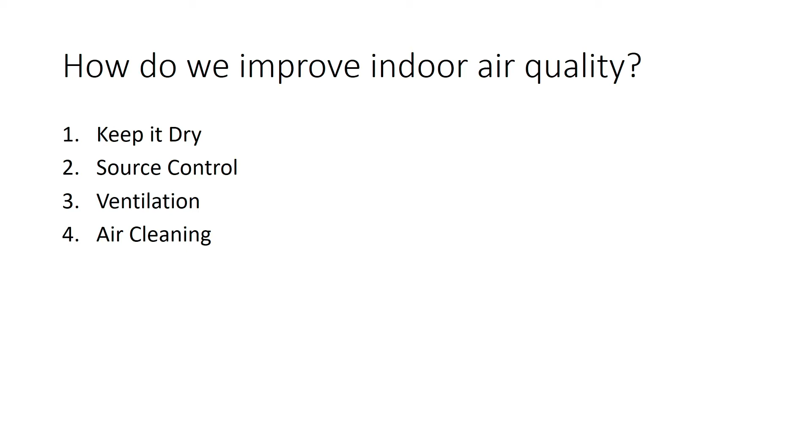And to put things in context, I want to situate filtration within indoor air quality. We've known for a long time how to improve indoor air quality, and it's briefly summarized by the four things that are on the screen. Some of them have a very long history.

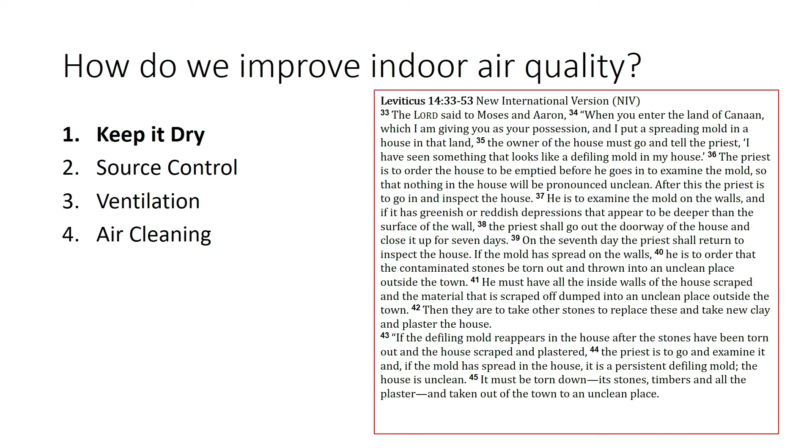Keeping buildings dry - there's a bunch of text here from the Bible that I won't force you to read, but it identifies what to do if you have a moisture problem in your house. The only comment I'll make about it is the field of mold remediation has not advanced greatly in the past few thousand years. We've also known that source control is really, really important.

Get rid of sources indoors so you don't have an indoor air problem. Dr. Pettenkofer, who was a German hygienist, had a lot of pithy statements about indoor air quality, like the one that's on the screen. And we've known that get rid of the problem before it becomes a problem.

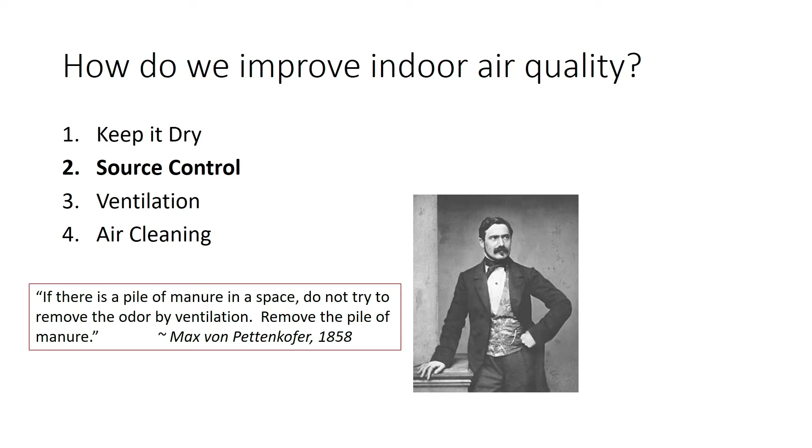Similarly, and from about the same time, we've known how important ventilation is. So these are a couple of chapter excerpts from a book by Catharine Beecher and Harriet Beecher Stowe, two sisters, and they wrote this book about the domestic realm. And it was a bestseller in the late 1860s and 1870s in the US.

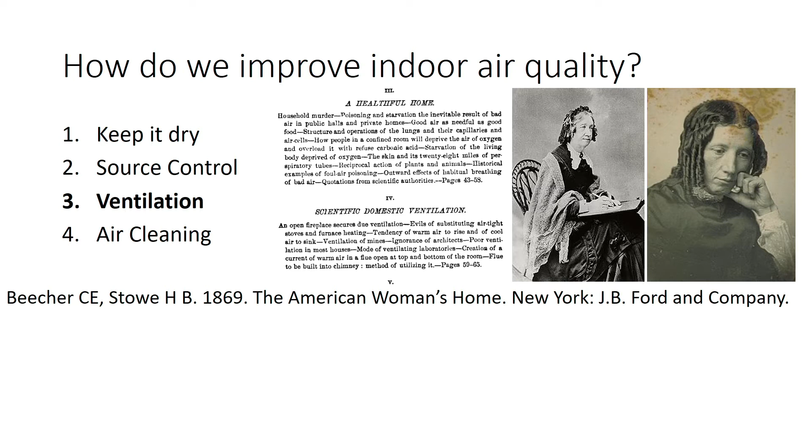What strikes me about this book is, there's a whole chapter devoted to indoor air quality. It was seen as being fundamental to having a healthy home. And then another whole chapter on ventilation and how important ventilation is. There's a tiny bit of aerosol science in this book having to do with venting of combustion as well. And it's just filled with great quotes that indicated that not only did people understand how important indoor air and ventilation were, but it was part of the conversation.

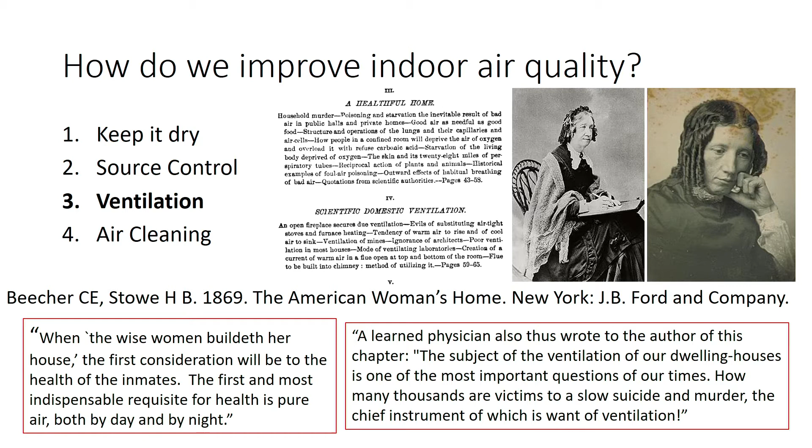And then we get to the subject of today, filtration. And filtration has a much, much shorter history than any of the other items that I mentioned. Filtration was originally largely used in various industrial processes. And then it started, maybe 50 to 100 years ago.

It started being used in buildings, but it was not used to protect people in the buildings. It was used to protect the equipment. Things like fans and coils and that sort of thing. And then it was really in the past few decades that we started using filters, thinking about protecting the people in the building.

ASHRAE standard 52.2, which is a very common filtration standard, and I'll talk more about it a little bit later, it's really only a couple of decades old. Its first version was in 1999. And so we really are talking about something today that certainly isn't part of the popular conversation and doesn't really have the history that other things we think about in indoor air.

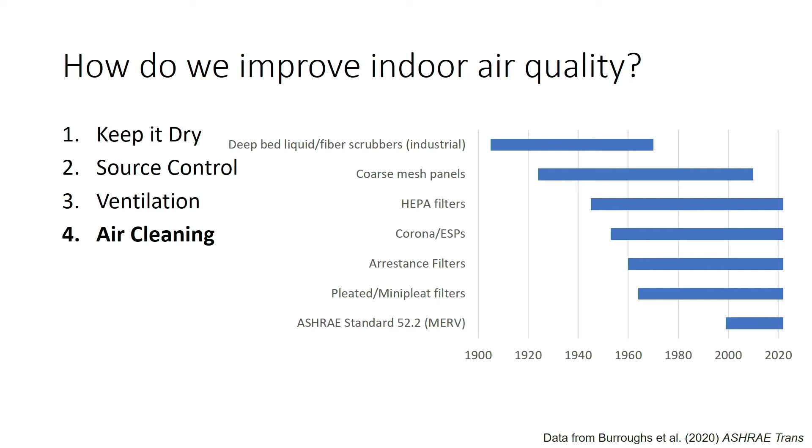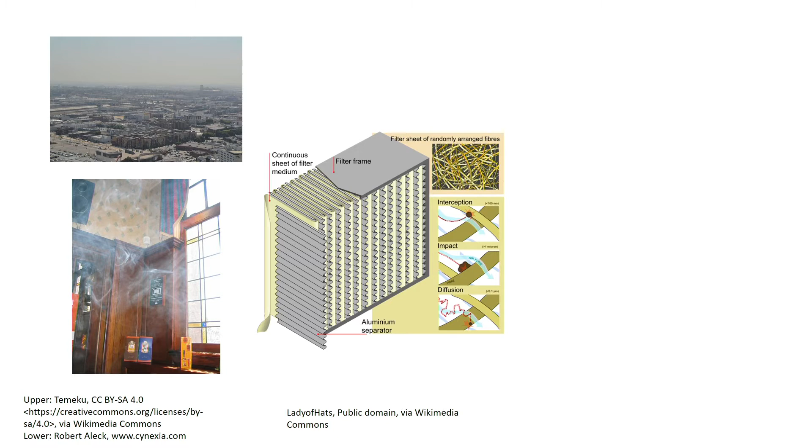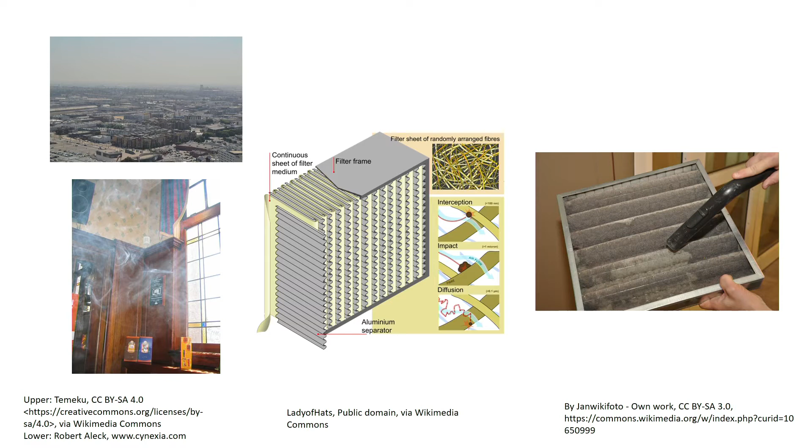Now, having said that, I think why a filter might be valuable is pretty obvious and pretty clear. We have polluted outdoor and indoor environments. We can use a filter that removes particles by a bunch of different mechanisms, and that filter gets dirty, and it's removing things from the air that people won't breathe in the building. So I don't think it's a hard concept to understand why filters might be beneficial.

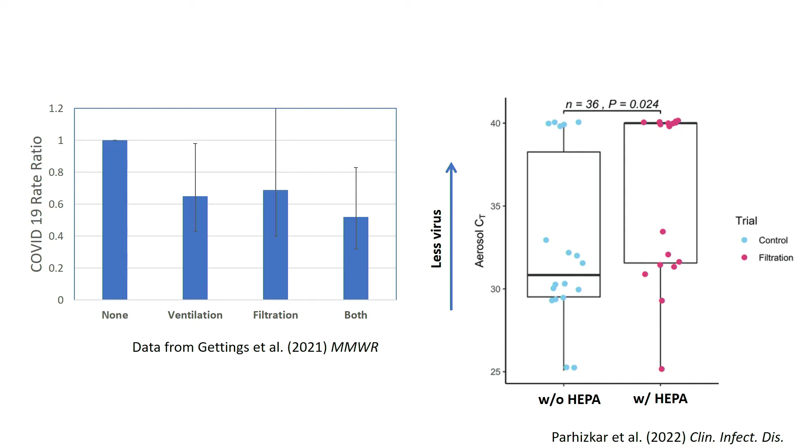What I want to do now is motivate at least the first part of this talk using data from my own university. In the summer of 2021, when University of Toronto was going back to in-person teaching, the university decided to follow a procedure being promoted by AAAR, among others, to improve ventilation and filtration in all classrooms that were going to be used.

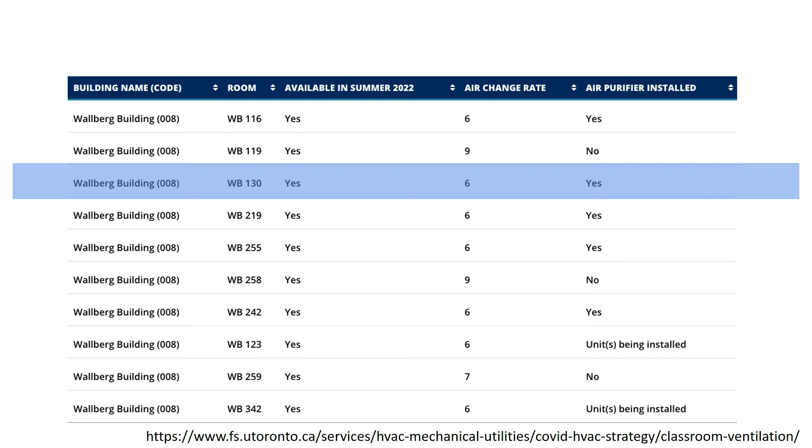Well, of course, we like to measure things. We used low-cost monitors to measure both CO2 and particles in several locations in the classroom, and anytime there was a decay that met our criteria for analysis, we looked at what the removal was. The story is that there was supposed to be about 2 air changes an hour from ventilation; instead we were a little less than 1. And there was supposed to be 6 air changes an hour combined from ventilation plus filtration; instead we were at about 2.

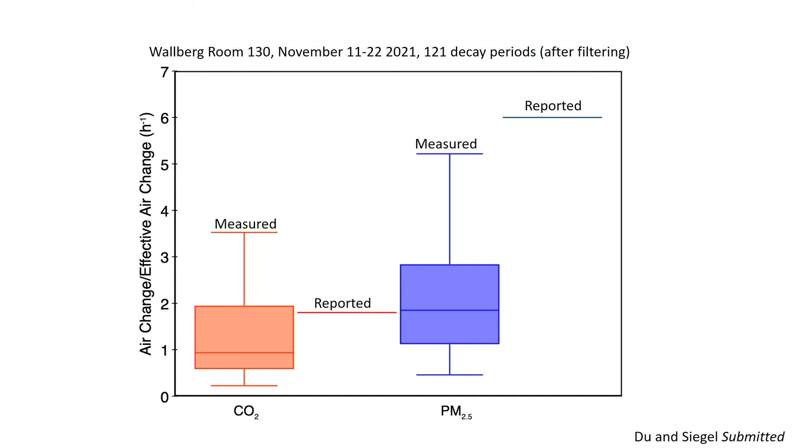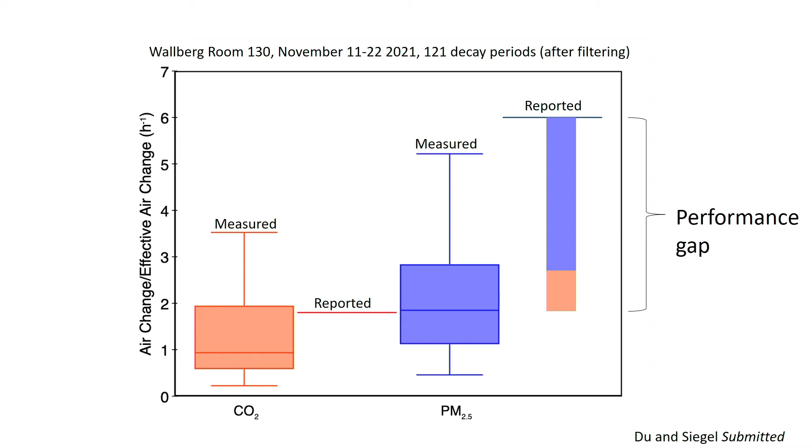So there's this pretty big performance gap. A little is coming from ventilation not doing what it was supposed to, but there was a big gap in what filtration was supposed to be doing. So what I want to do now is talk about why filters don't necessarily do what we think they're doing. The overall story is that we think about filters as objects, but really it's the context and how they're used that determines their performance.

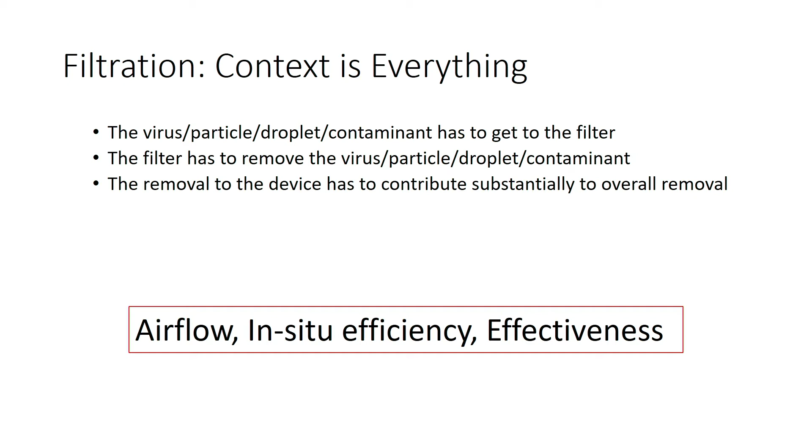I divide this into 3 bins in my mind: you have to get whatever you're trying to remove from the air to the filter; once you get it to the filter, it has to remove it; and then that removal has to compete with all the other loss processes happening in the space. I want to talk about each of those in a little more detail so you have a sense of some common failures.

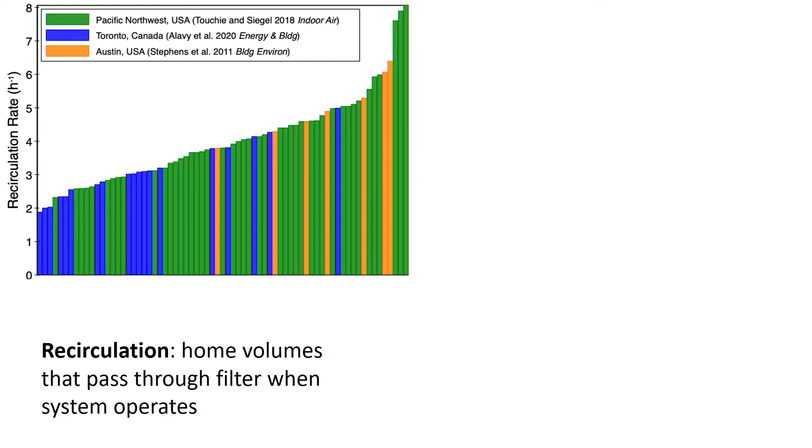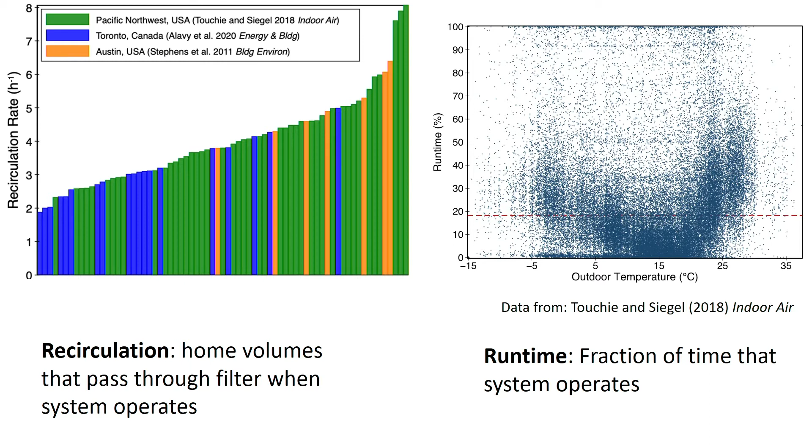You can see there's a little structure here. Systems run more when it's colder or hotter, which makes sense. But the bigger story is, first, there's a ton of variation — some systems at a given set of outdoor conditions run a lot, others barely run at all. Even more important is the average. That red dashed line is the median runtime, about 18% in this sample, which is very consistent with other studies. So 80+% of the time, it doesn't matter what filter you have in place, because air isn't going through it. This is certainly a residential phenomenon, but also true in several commercial systems. So the system really matters, and of course the filter matters too.

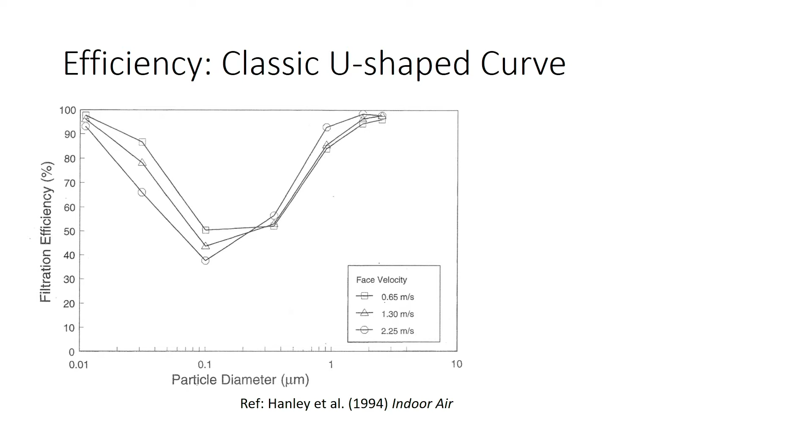Many people here are familiar with filter efficiency curves. They're higher for small particles because of Brownian diffusion, and higher for large particles because of inertial mechanisms. But the reason I wanted to show this picture is that the authors varied the face velocity. When face velocity is high, you get less removal of smaller particles because they don't have as much time to diffuse, but more removal of larger particles because they have more inertia. This matters because face velocities are all over the map in typical HVAC systems, and in many cases they vary too. So the performance you get at any one moment in time will be different than at another moment. This is particularly important for filtration standards.

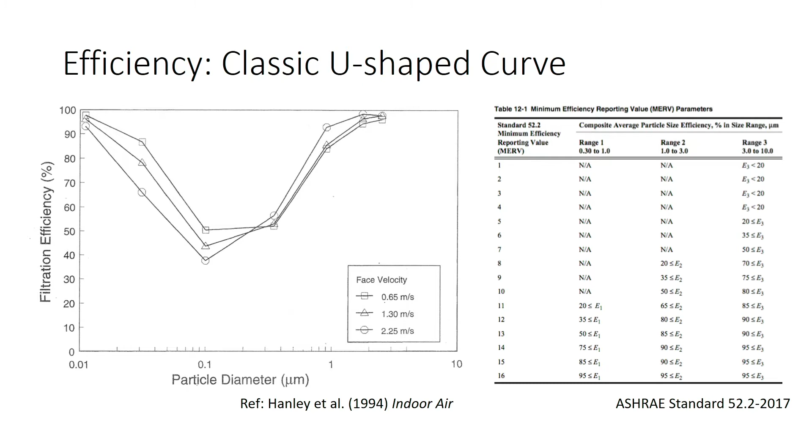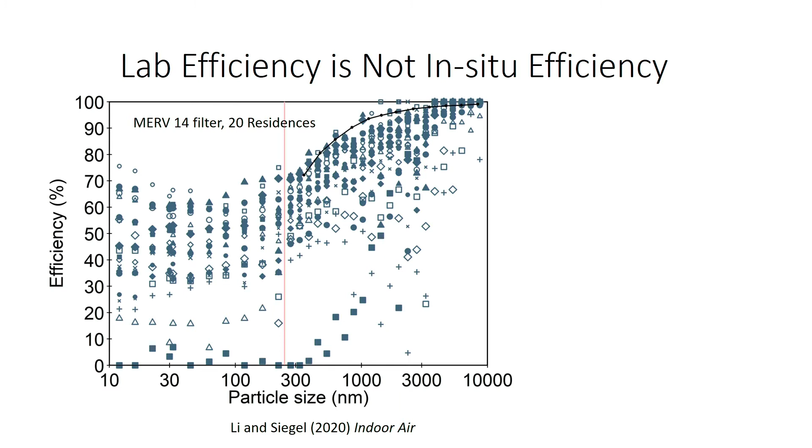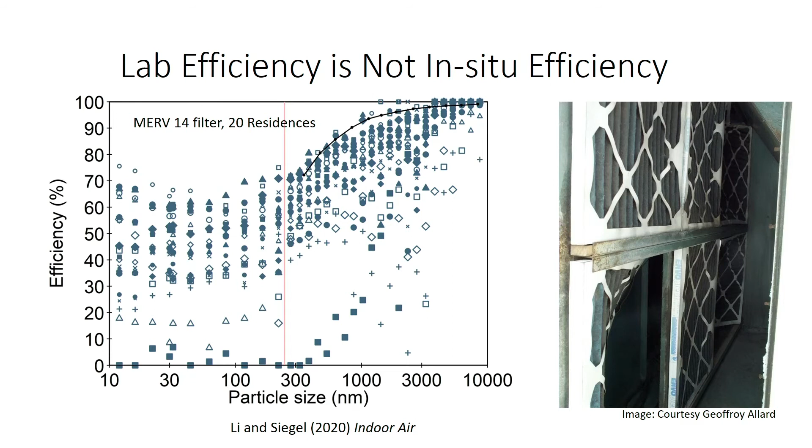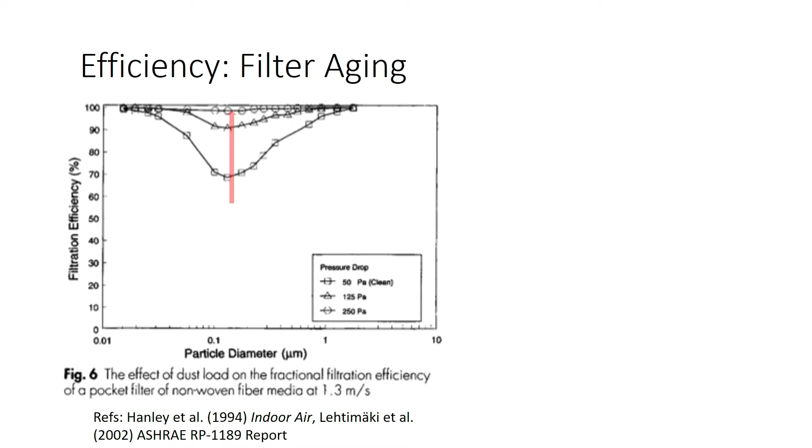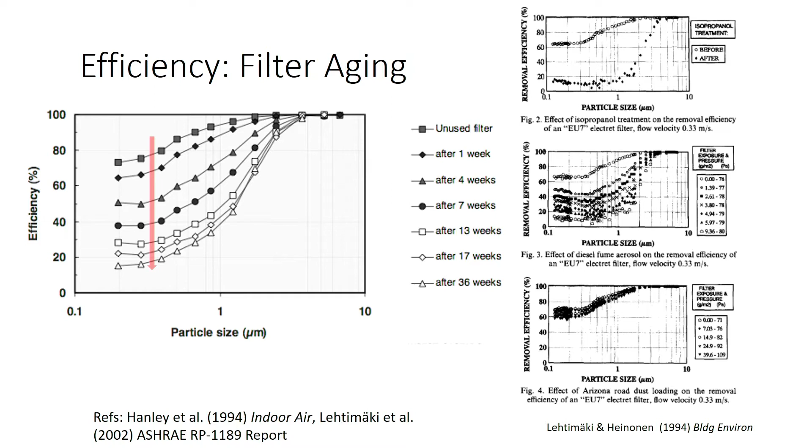So all of a sudden we have this problem: this aging effect is obviously filter specific, but it also depends on what's being loaded, and that's going to be different in every filter use. Here's a concrete example of that.

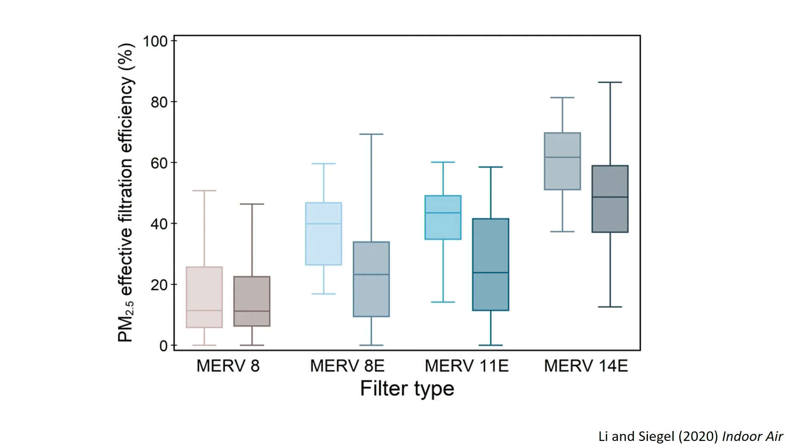They have all declined in performance on average as they've aged, although the amount of decline is very home specific. The one filter, the MERV 8, which was the lowest efficiency filter we tested, nonetheless didn't decline in performance on average. So you run into this issue: this is a very real effect, but how real or how important it is in a given application can be variable.

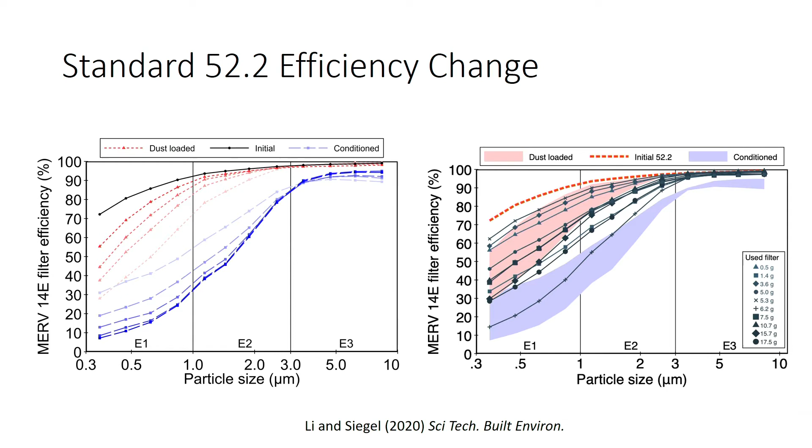You can see that every filter we sent back to them has a different efficiency curve after three months, and they all show up in different places in the dust loading and conditioning. So it gets very hard to standardize this effect because it's so variable. And one comment from the figure is that the amount of dust or loading on the filter did not strongly affect where it was in the efficiency degradation, so it's a more complicated effect than just amount of stuff.

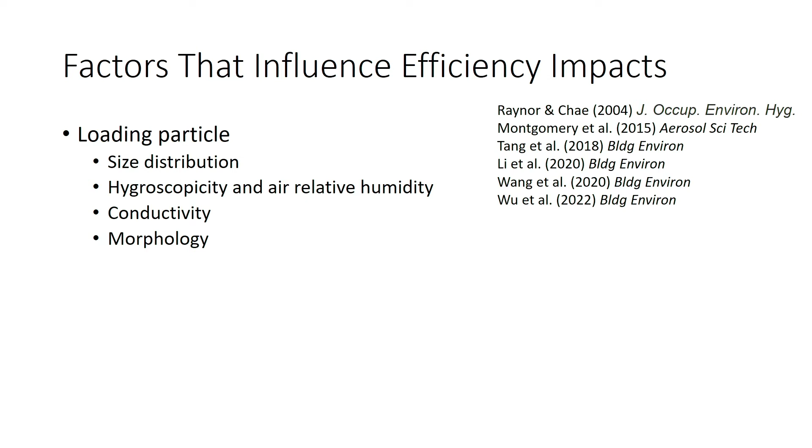It turns out there's a ton of great aerosol science research on what's causing this. Some factors we know to be important are the size distribution of the loading aerosol, how hygroscopic the aerosol is, relative humidity changes in the air, the conductivity of the aerosol, and the morphology of both the particles and the deposits that form on the filter. There's cool research showing that under some relative humidity changes, some aerosols end up forming dendritic structures on the filter fibers, and those appear to really impact how much degradation there is. This underlines the complexity of this phenomenon, which is really important to how a filter performs.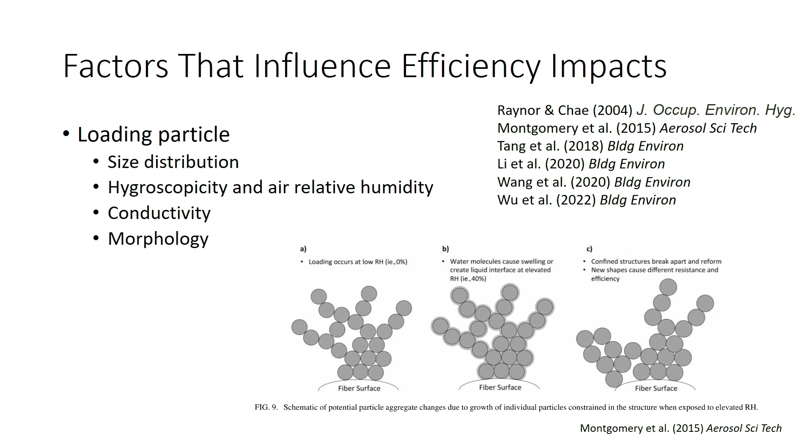The last point I want to make about filter performance is filter effectiveness. Effectiveness is a concept that's been around for a while, but the idea is you look at the ratio of the concentration with a filter to some reasonable baseline.

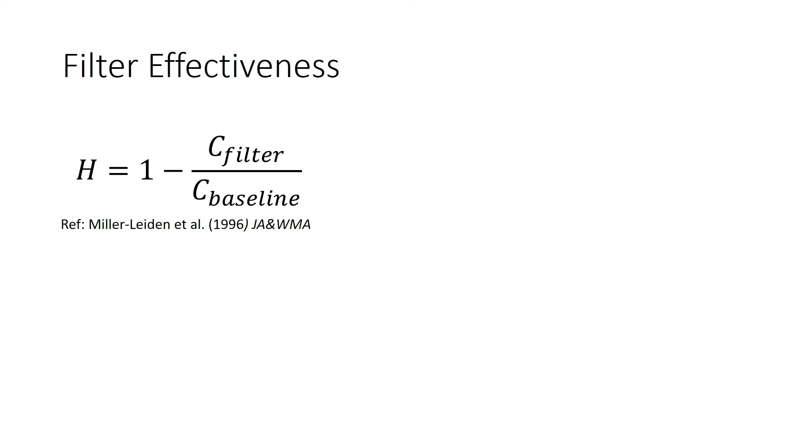It's in fact even a little bit worse than that. These are simulation results showing the effectiveness of different filters in an archetypal residential house as a function of runtime. The tests I showed you previously were typically done comparing fan-running versus fan-not-running, and don't account for the fact that fans only run some of the time. So this plot tells us two things: one, if you have a low filter efficiency, it doesn't matter how much your system runs because the filter isn't removing stuff. But even more importantly, if your runtime is very low, as it can be in some scenarios, your filter efficiency doesn't make much difference because the filter doesn't have a chance to remove things.

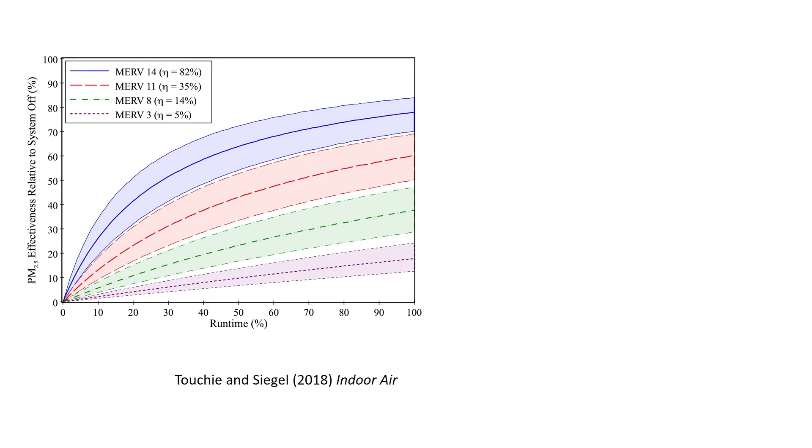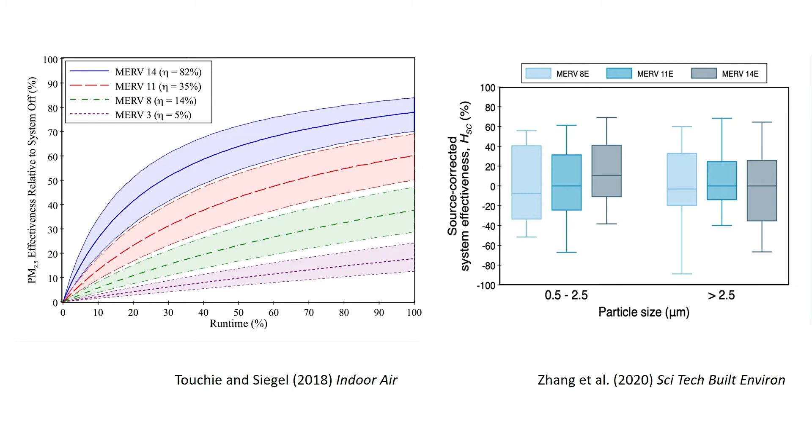We see this in real data as well. These are based on long-term continuous measurements in each of our homes, and this is the effectiveness calculated relative to the MERV 8 filter. You can see that for all of our filters, including some nominally quite highly efficient filters, the effectiveness is never significantly different from zero on average in these homes. There are a lot of reasons for this, but one of the big ones is that the runtime was really low. Over the year, we had a very mild weather year in Toronto, so our runtime was about 10% on average across all our homes. That means the filter doesn't matter very much because the system just isn't running. So all of a sudden, little issues become important, like whether the filter happens to be running when an indoor source is present. This gets at the complexity.

I've talked a lot about central systems, but given how much portable filters are being used, especially with COVID, it's important to talk about portable filters a little bit. These are results from a research group in China where they deployed portable air cleaners in some homes and looked at their CADR, which is their flow rate times their efficiency, as a function of operation time. You can see these filters decline in performance as they age as well. Here it's somewhat of a charge effect, but mostly what's going on is a flow effect.

As a filter loads, it gets a higher flow resistance. The fan is able to move less air through the filter, and the CADR goes down. And again, it's very specific to what it's being loaded with, how much, and the filter design itself.

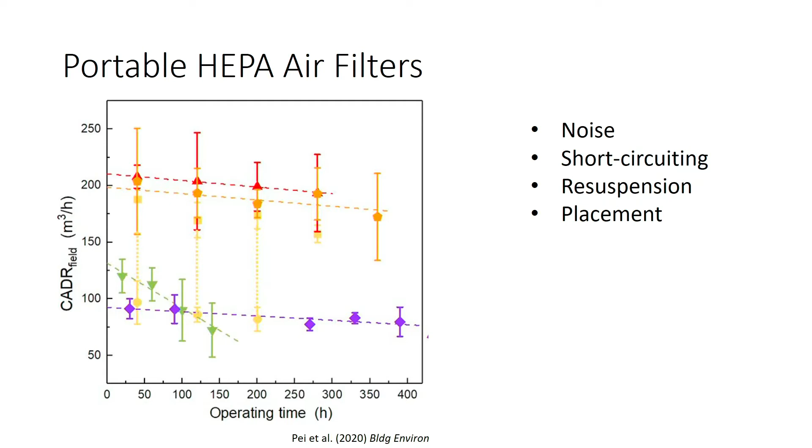There's a lot of other issues with portable air cleaners. Noise can be an issue, and that affects user behavior. In many cases, they short circuit, meaning they clean the air locally, not more broadly in the space. If they create airflows, they can resuspend particles from surfaces.

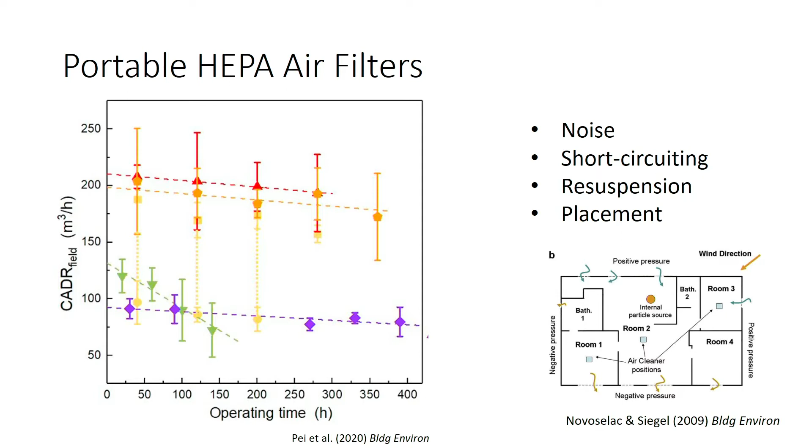And then there's, of course, a big placement issue. If you put filters near a source, you're going to get much better removal of that source, obviously, than if you put them far away from that source. And that's well established in the literature.

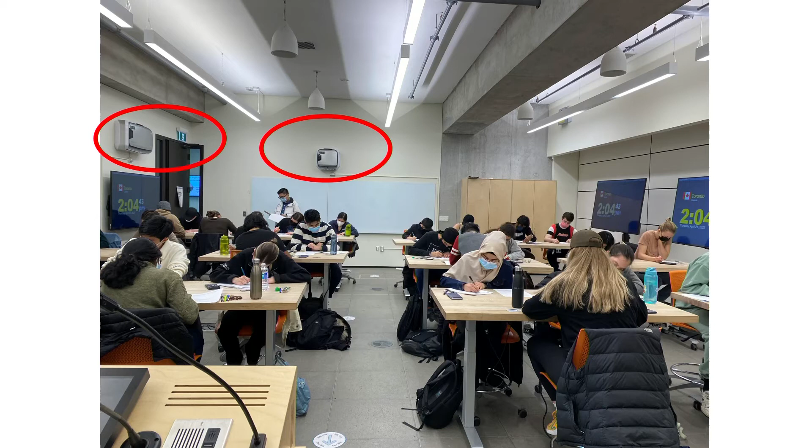So just to make this practical, these are my students writing an exam last spring in a classroom that was far, far too small, and that's another story for another day. But this is one of the rooms that use portable air cleaners to get 6 air changes an hour, and you can see the 2 portable air cleaners in the room, and notice that they're kind of on one side of the room. So that works out great maybe if you're right near those portable air cleaners, but if you're on the other side of the room, you're not getting very much benefit. And so this issue of placement is pretty important.

I feel like I've spent the past 20 minutes or so being kind of negative, but I do want to make a really important point. Filtration does work. And I'm part of a National Academies committee that's reviewing the evidence on the health effects of filtration. We've found about 69 thus far papers with strong controls that measure a health effect. And generally speaking, there is a health effect associated, a positive health effect from the use of filtration.

There's a very consistent message here, although there is also some variation. For example, the environment, the outdoor air in particular, where filters is used, turns out to be important. There is an issue that most of what we have about filters and health effects are very short-term studies, and so some of the long-term health effects are less clear. And the one comment I'll make is that many of these studies don't even address the context at all. So, of course, you can use a filter well or you can use it badly. But nonetheless, filters do reduce health effects.

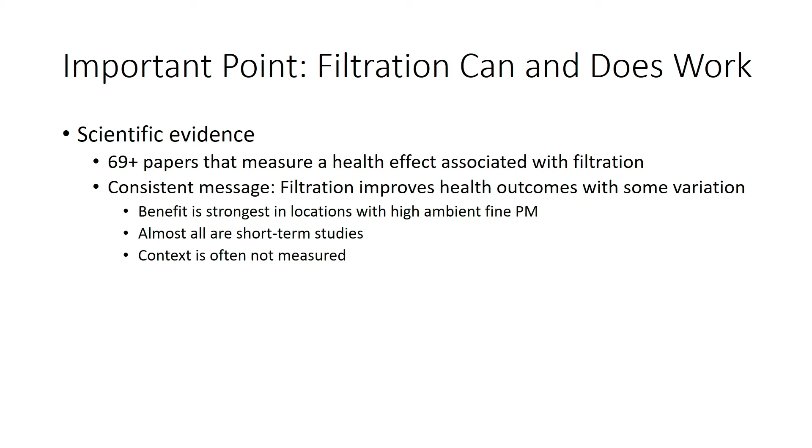There's also a very strong economic argument that can be made for filtration. These are 4 studies that looked at the benefit to cost ratio for filters, different efficiencies, different methodologies, different types of buildings. But the overall story here is they all found kind of somewhere in the neighborhood of 10 to 100 benefit to cost. Meaning for every $1 we spend on filtration, we get $10 to $100 of economic return. Now, the vast majority of that is avoided healthcare costs. Some of it is in things like improved productivity, reduced absenteeism, those kinds of things. But really, this is mostly about health effects.

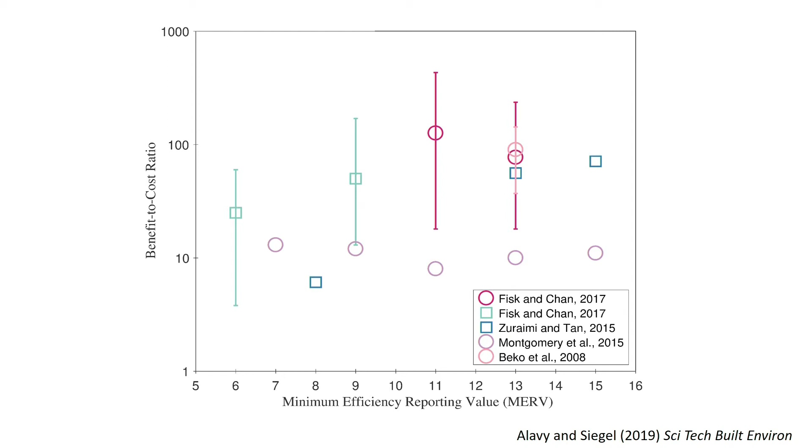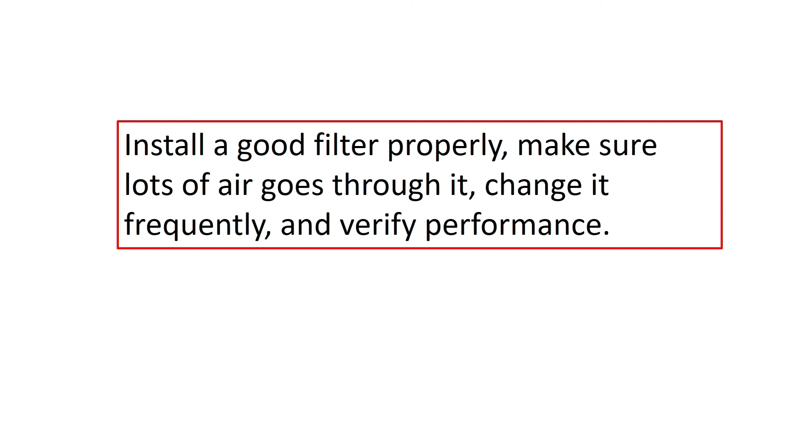One of the arguments I've kind of made consistently during COVID is that we're leaving money on the table by not investing in filtration. So the story thus far is: pick a good filter, install it well, make sure air goes through it, change it frequently, and make sure it's doing what you think it's doing. So that's the big secret of filtration, is that their performance is related to all these other variables beside the filter itself. But there's a lot of other secrets of filters that are worth talking about.

One of them is that filters do a lot of things beside removing particles. So the plot I just brought up is from 4 studies that all looked at the removal of ozone by used particle filters. And you can see that all of them remove ozone to different amounts. And this is not a filter that's designed to remove ozone. And that seems like a good thing, because less ozone in the air. But of course, it's not for nothing, and there's byproducts being formed here.

And there is a tiny literature, not a huge one, on some of the byproducts that come from the ozone and other reactions on filter surfaces. And they are very reactive surfaces. There's a lot of stuff from the air that accumulates on them, and that leads to potential formation of byproducts. And one of the comments I'll make is, for those of you who live in homes where you change the filter, you might notice that sometimes the filter smells, and some of that odor is often the result of chemistry.

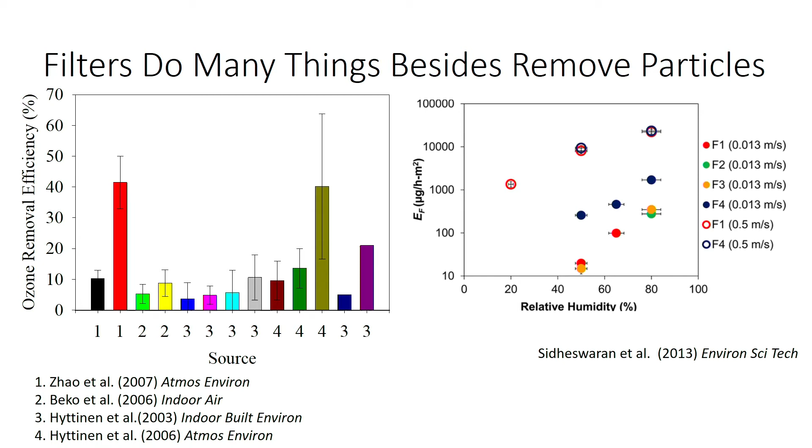It's also the base filter material itself. This is some research where researchers were specifically looking at formaldehyde emissions from new filters. They found quite significant formaldehyde emissions from some filters, predominantly fiberglass filters, as well as filters covered with a tackifier, which is a common thing filter manufacturers do to increase how likely particles are to adhere to the surface. The thing that always struck me about this research is the strong relative humidity effect. You get a lot of formaldehyde production from some of these filters, in particular when the relative humidity is high. So a filter serving outdoor air in a humid time of year can really produce a lot of formaldehyde. Filters are doing other things besides just removing particles.

Of course, the world of air cleaning is much bigger than the media filters I'm predominantly talking about today. There's a whole bunch of other technologies, some of which I've listed here, and manufacturers make up names all the time—activated oxygen, all kinds of other funny names. The bottom line here, without painting with too broad a brush, is that a lot of these technologies, and a lot of the instantiations of these technologies, don't work particularly well. Sometimes they don't work at all, and in some cases there's the potential for the production of harmful byproducts.

So we have this whole industry—most times I estimate somewhere around half to maybe three-quarters of the industry is involved in these air cleaning technologies that don't really work, don't really have independent tests to verify that they work. And there's all kinds of things manufacturers do to make air cleaning technologies look good: test in very small chambers, test at very low ventilation rates, report metrics that are non-standard that make removal look bigger than it actually is.

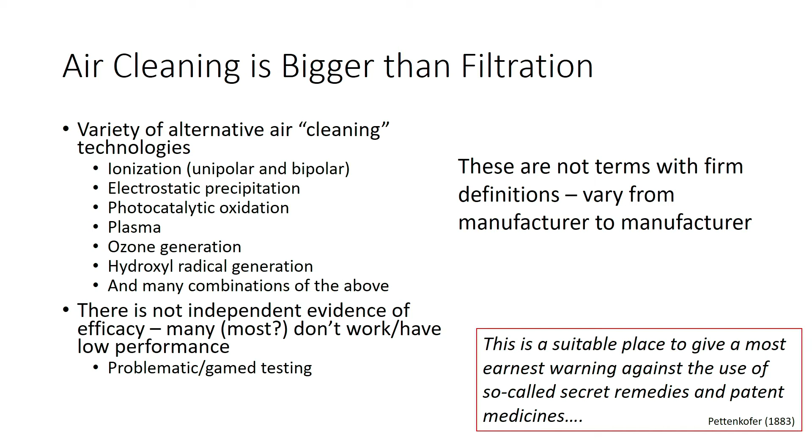So I'll go back to Dr. Pettenkofer again—he wasn't talking about air cleaners, but the quote is good anyway. This is a suitable place to give a most earnest warning against the use of secret remedies and patent medicines. I could say a lot more on that, but on the advice of my attorney, I'll move on.

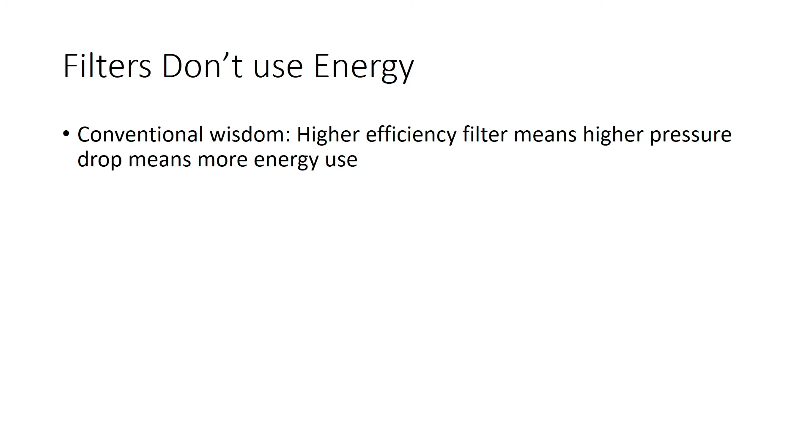Another secret of filters is there's a lot of confusion about the interaction between filters and energy use. The conventional wisdom I've heard over and over, no matter how many times I try and suggest it's more complicated than that, is: if you want a better filter, a higher efficiency filter, you're going to have a higher pressure drop, and if you have a higher pressure drop, that's going to lead to more energy use. It turns out both parts of that statement are not quite right.

These are some data compiled by Marwa Zaatari of new filter pressure drop in a filter test rig, at a standardized face velocity, as a function of MERV. There's about 120 or so filters represented in this figure. You can see that, sure, there's an association—higher MERV means bigger pressure drop on average—but there's a ton of variation. That's because pressure drop comes from the velocity the filter is used at, but in this figure pressure drop also comes from the design of the filter. You can have a very thin media with high efficiency and relatively low pressure drop, then pleat it with very deep pleats and get higher efficiency without the pressure drop consequences. So there's not a one-to-one correspondence at all.

Not only that, it depends on the fan in the system. The fan is what's using the energy here, not the filter, of course. It turns out we use many different types of fans and controls in HVAC systems. Very often we have no speed control at all, which means when you use a filter with higher flow resistance, the flow goes down. When a fan moves less air, the electricity it uses will also go down. So if we're just concerned with fan power, in many systems a higher pressure drop filter will actually save energy. Now it's not quite so simple, because things like air conditioner efficiency are also impacted by flow. So the studies that are out there, which aren't that many, show it's a pretty weak relationship between filter efficiency and energy use, and sometimes even the sign can go either way.

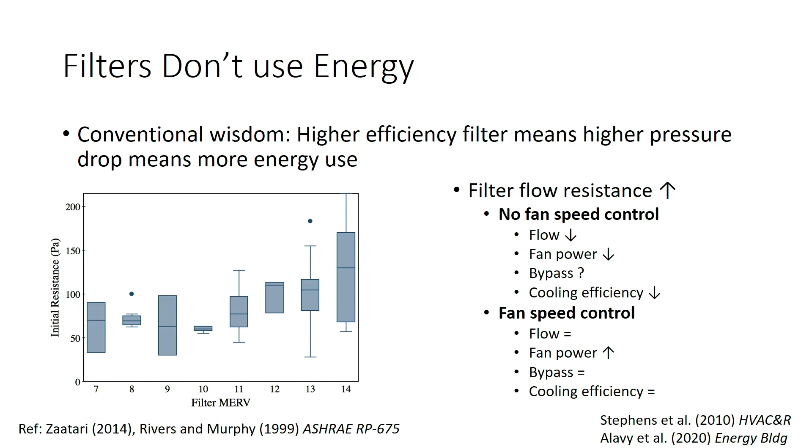Another secret, and maybe this is my secret more than a secret of filters, is everyone's got their fetish. One of mine is dirty filters. And the reason I like dirty filters is they tell us a story about what was in the air.

This is the first article I could find on a researcher who did this, from a group in St. Louis in the 1950s. They used filters in different neighborhoods in St. Louis to say something about what was in the outdoor air. It's been used many other times since then.

This is some data from a military barracks where they had an outbreak of an adenovirus, and they took samples from the filter and were able to track the outbreaks by looking at what was on the filter over time.

Another interesting, more recent paper is from a group in the physics department at the University of Washington. They took the outdoor air intake filters on the physics building and saw the plume from Fukushima Daiichi as it moved over the western US by looking at gamma ray spectroscopy at the filter.

A few years ago we wrote a review paper. There were maybe 70 or so articles in the literature, and I'd guess it's roughly doubled since then. So this has been used widely.

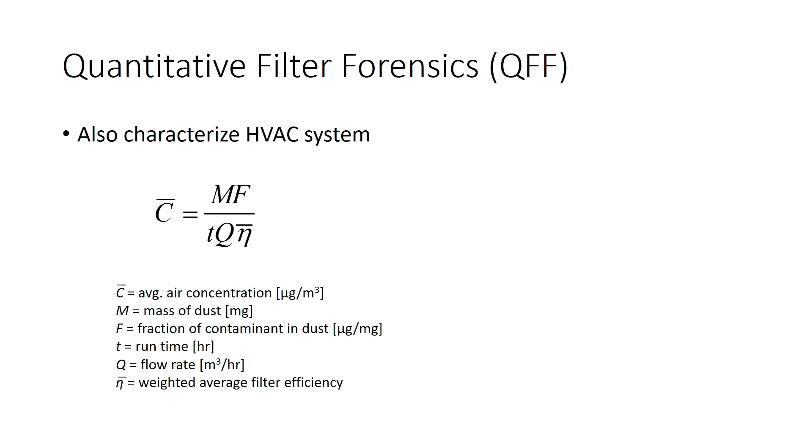What we do is try to make this a little more quantitative. We calculate the average concentration by looking in the numerator at the mass collected on the filter, as well as the fraction that's the contaminant we're interested in. The denominator is a complicated way of getting at the volume of air that went through the filter over its lifetime. We do things like measure the runtime of the system, measure the flow rate, and do some in situ efficiency measurement to get this.

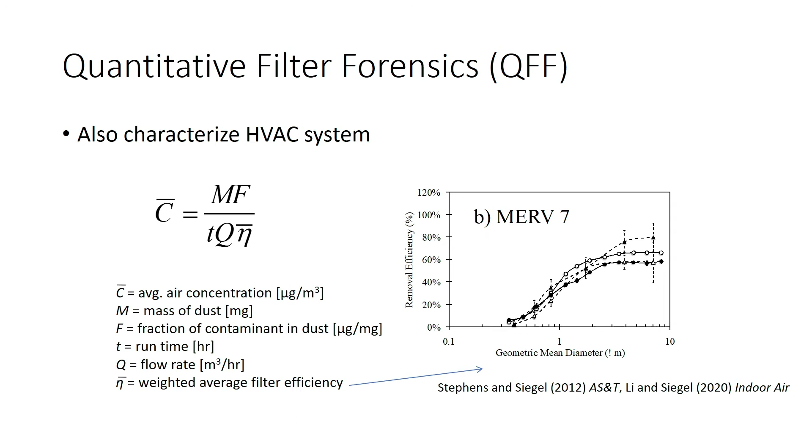Once you've done this effort, you get a time-integrated concentration over the length of time the filter was installed. Here are some examples from homes in central Texas.

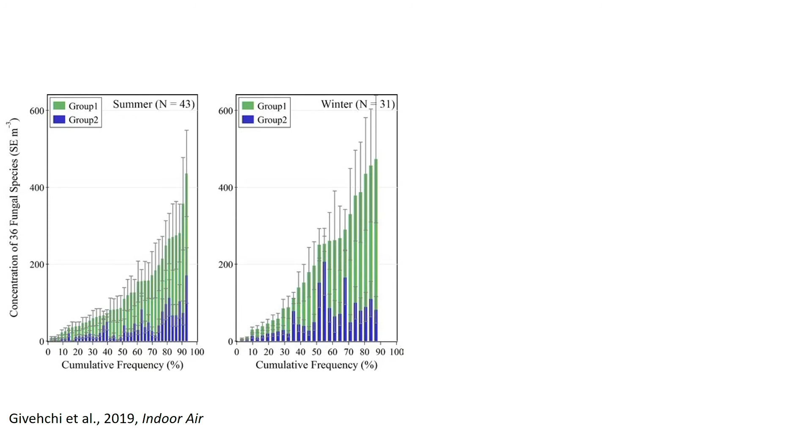This particular plot looks at two groups of fungi. The group in blue is nominally associated with moisture problems. You see a different fingerprint in each house, even more distinct when you look at individual fungal species, as well as a seasonal difference that is reflected in what collects on the filter.

Even more striking is this data on OPEs in the same sample of homes. You can see two things: a very clear fingerprint difference, with some very common OPEs in some of these homes, and if you look at the y-axis scales, a big difference between the two seasons.

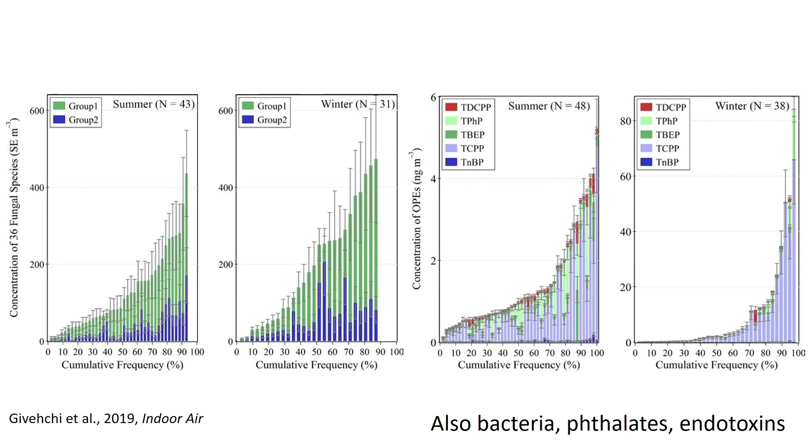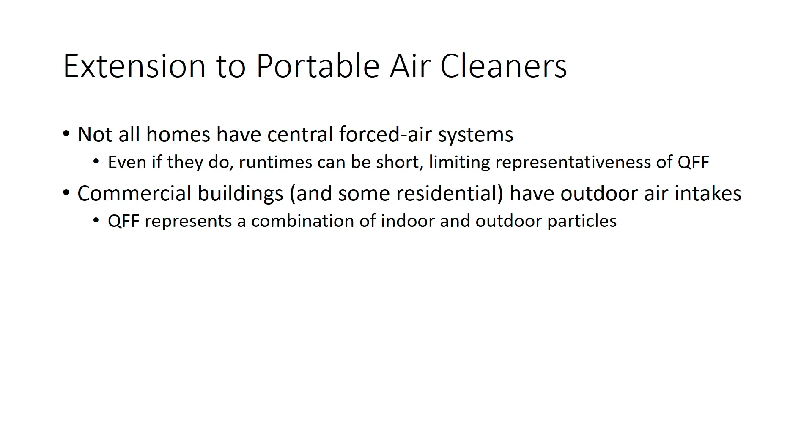Of course, not every building has a central forced air system. And even if you do, if you have short run times, the sample on the filter might not be that representative of what's in the air. Many commercial buildings and some residential buildings have outdoor air intakes, so the filter is seeing some mix of both indoor and outdoor air, making it hard to say something about indoor air by just looking at the filter.

So instead we deploy portable air filters and analyze them afterwards. This is a picture of filters from a social housing apartment building in Toronto. These filters all came from the same week in different apartments in the same building. The one with green tape is a blank filter, to give you a sense of what it looked like when clean. You can see, you don't have to be an aerosol scientist to say, hey, look, there's something different in the air in these homes.

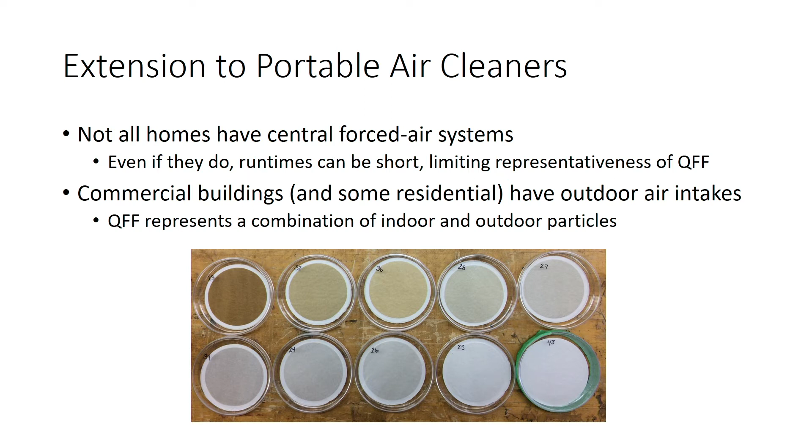In particular, the dark brown and some of the other brownish filters, that's tobacco smoke. Those are units that were either smoking themselves or were heavily impacted by their neighbors smoking, as well as a mix of other stuff in some of the other filters.

And so when you do that, this is a plot that shows phthalates across 3 seasons in these homes. There was an energy retrofit in between some of these measurements, so we were particularly interested if the retrofit affected concentrations. You don't see a particularly strong retrofit effect, and you don't see much of a seasonal effect. But what you do see is this wide variation between apartments, even in the same region and in some cases the same building.

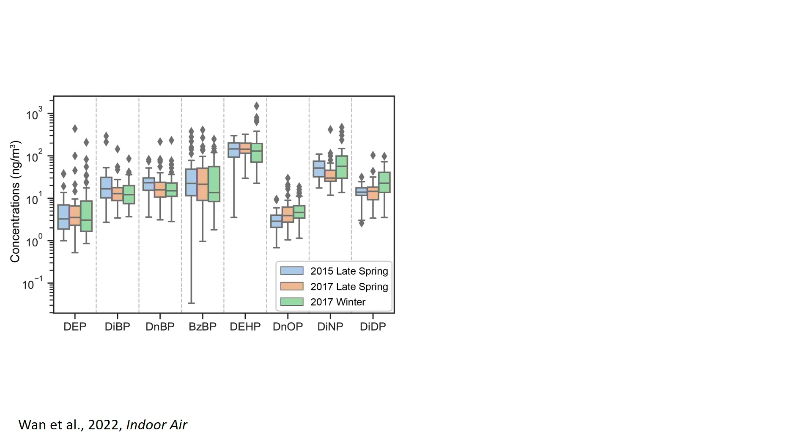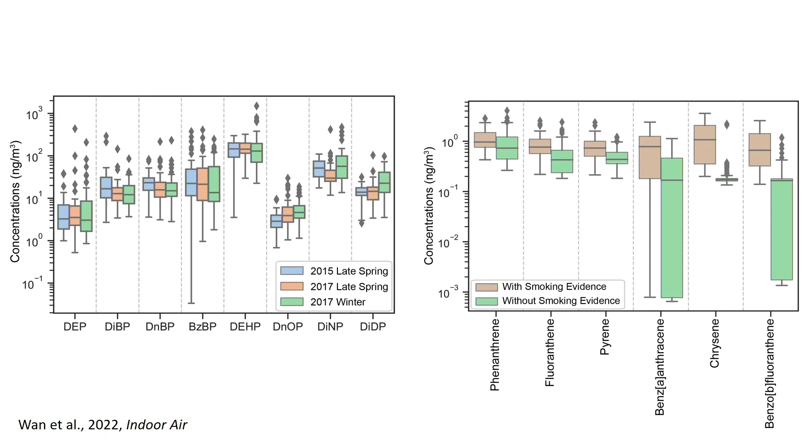You see also evidence of particular sources. So this is looking at PAHs, and you can see there is clear evidence for some of the PAHs of smoking going on in the apartments, or at least a difference between smoking and non-smoking apartments. So you really start to see what's in the air in these environments by looking at what collects on the filter.

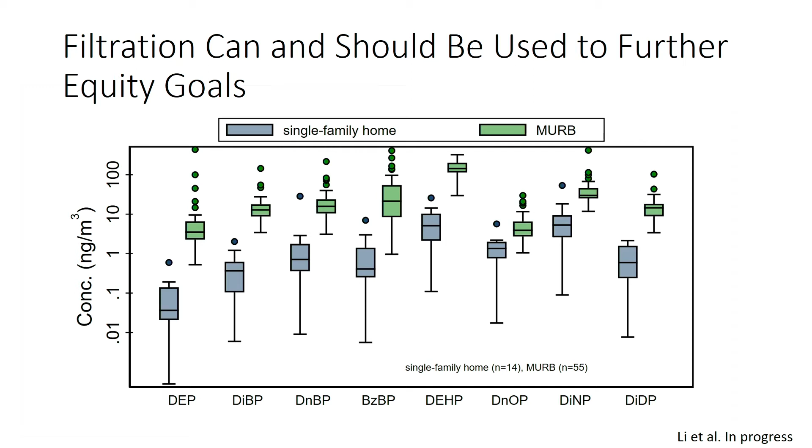At some level, I find it helpful to see the difference, but I think we really have to be thinking about what we're doing about it. And I don't want to sound naive - I'm about to sound really naive on the next slide - by saying filtration is the only solution here. But it is part of the solution, that some of the particle exposures contributing to health disparities we see can be addressed by filtration. Given the money spent on healthcare, I think we really have to look seriously at whether we could further equity goals and improve health outcomes by the use of filtration. And I'm disappointed, especially with COVID, that we haven't done more.

The medical treatment, and especially the pharmaceuticals, are very expensive. The families have to come along as well, so they have to be supported, given a place to live, and supported while they're there for the health treatment. The parents' income is disrupted, and then there's, of course, enormous social costs as well. Again, filtration is a small part of what's going on here - there's a lot of issues with housing quality and other systemic issues that are the big part of the story. But my point is simply that, on an economic basis, we're foolish for not trying things like filtration, because even if we affect a very small number of cases, it more than pays for whatever cost we have. And I hate to say it, but some places in the world do have socialized medicine, so there is even a raw economic argument to be made for this.

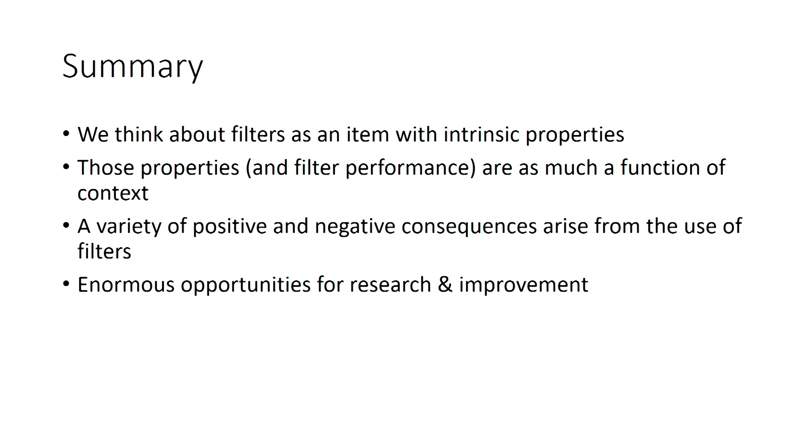So in summary, we think about filters as an item with intrinsic properties, but those properties, and more broadly, the performance of the filter, is as much a function of the context as it is the filter itself. There are all these positive and negative consequences that arise from the use of filters. And speaking to many of the younger scientists in the room, there are so many unexplored research questions here, on a lot of the details and nuance of what I've said, that really are important for us as a community to explore. I'll finish by acknowledging - it would be a very long list if I wanted to acknowledge everyone who has contributed to my career - but the students, postdocs, and collaborators are those who contributed directly to what I presented today, as well as the funding sources for some of the studies I presented. Thank you.